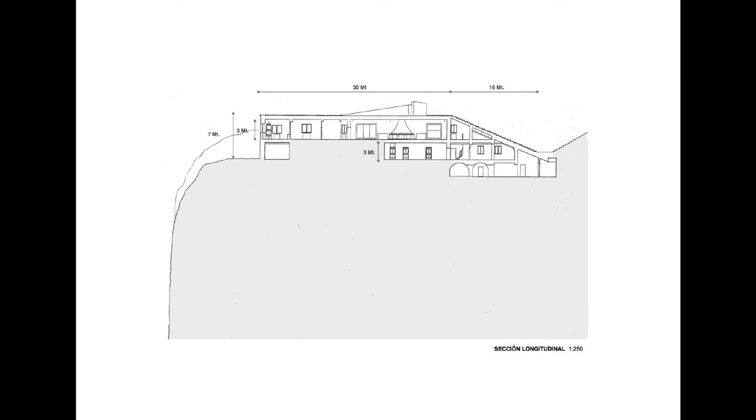You can see the entrance part, you can see the exterior staircase to enjoy the view, to enjoy the horizon and make connection with the sea. You can see the bedrooms, you can see the lights. So this is Villa Malaparte, a really important part, a really important period, a really important spot in modern architecture history.

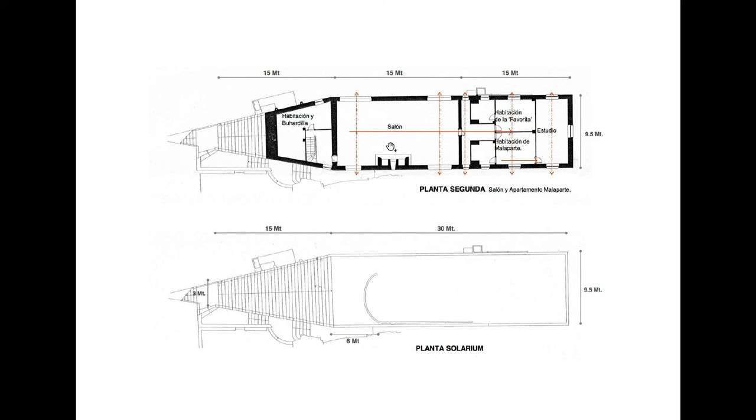In the plan, there's a special living area divided for the client, the writer Malaparte: the rooms, bathrooms and studio where he could work, the saloon where he could invite guests, and underneath it small bedrooms with really beautiful views to the ocean, to the sea.

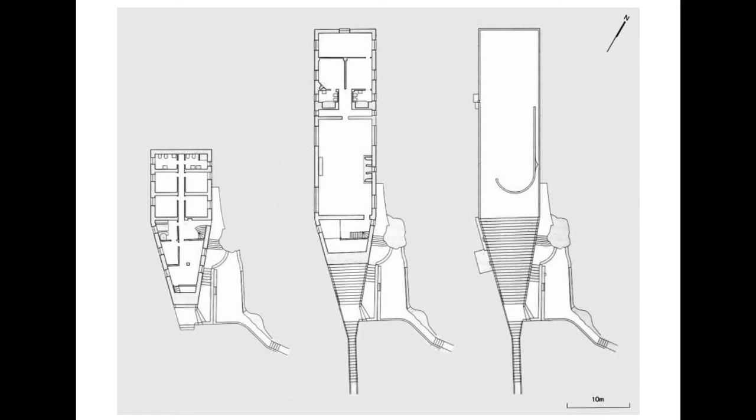And this is part of the cliff. It's between an art object, a cliff, and a building. That's how you can preserve a little bit of the natural environment and not use all the sources that are there—just the place and the material that you need.

It's really beautiful. Okay, let's continue with the Wall-less House again, from Shigeru Ban.

He believed that the material does not need to be strong to be used to build a strong structure. The strength of the structure has nothing to do with the strength of the material.

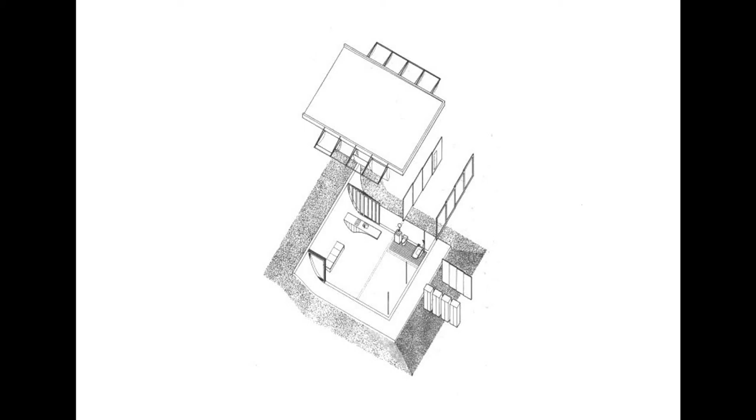Try to understand this: Shigeru Ban shifts from the horizontal living platform into a vertical boundary in one seamless move, blurring the edge conditions that make spatial reading possible. Its Cartesian geometry is deformed to meet program requirements.

A field of wall-ground hybrid protrudes into space like a table. The surface formation establishes a universal floor on which spatial zones are positioned around isolated objects of sanitary equipment.

Space becomes adaptable and interpretable in the bounding of specific areas related to the program. There is a shift of interior and exterior spatial boundaries. Rooms that were once public can become private and vice versa, simply by using the sliding windows and sliding walls.

In the house without walls, vocabulary must change. There is no bathroom, no bedroom, no living room. The wall-less design informs a roomless language.

You can see there is the bathtub and the toilet in the middle of the space. There is a wall-less space, a no-room zone, a roomless situation, and you can just separate the life of the house with curtains and not anything else.

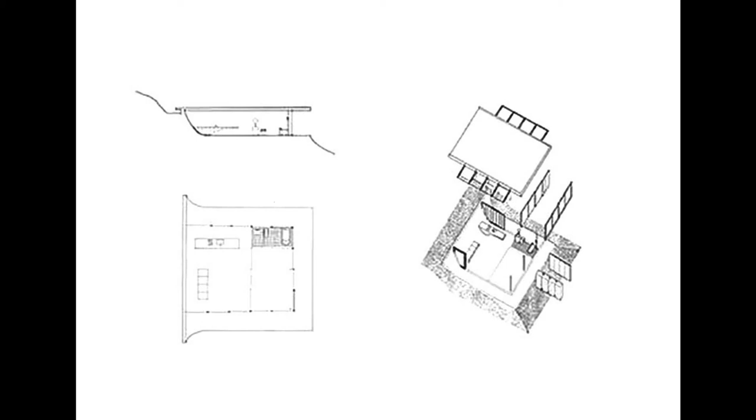The roof is flat and is fixed rigidly to the upturned slab, freeing the three columns at the front from any horizontal charges. As a result, bearing only vertical loads, these columns could be reduced to a minimum of 55 mm in diameter. All the walls and mullions were purged to express the structural concept as purely as possible, leaving sliding panels only.

Especially, the house consists of a universal floor, on which the kitchen, bathroom and toilet are placed without enclosure, which can be flexibly partitioned by the sliding doors inside. So you can create the spatial system in the house via the use of sliding doors, sliding elements.

I know it's really hard to think how we could live in that kind of space, but this is how architecture evolves, how this is changed. Sometimes you have to make experiments and you have to break the rules. And this shape of the wall and of the hill is really a nice connection and a nice meeting point between the built and the natural environment.

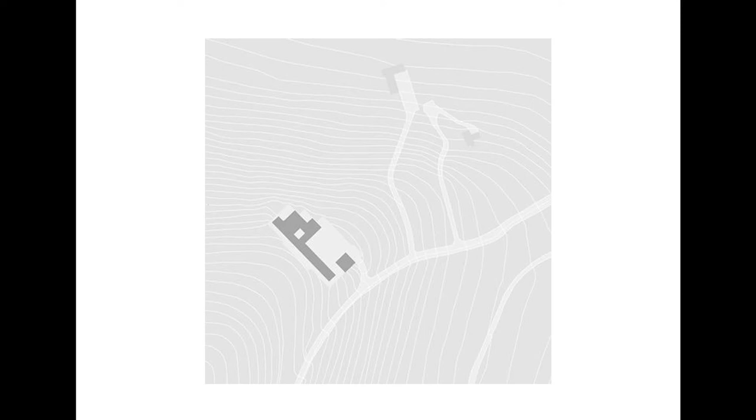Pale brickwork, broad columns and a courtyard planted with trees are all features of this country house in the Chiltern Hills by architect David Chipperfield, which was recently named the world's best new house. Designed for a property developer and his wife in Buckinghamshire, Field House is a single-story residence that stretches across a steep landscape.

It won first prize in 2018 at the Architectural Review House Awards, and many other prizes after. The house is located in the Chiltern Hills, a densely wooded chalk escarpment of over 300 square miles. Responding to this, the building was conceived as a large earthwork dug into the sloping ground. Its roof is set down well below the level of the tree canopy, while 4 sunken courtyards are concealed behind the walls.

The site had previously been occupied by an early 20th century house made up of a series of 8 buildings, including stables, a gym, a greenhouse, and an outdoor swimming pool. As with many of his projects, like the St. Louis Gallery in Missouri or his own office in Berlin, Chipperfield chose to simplify, creating a single 888 square meter building, all one level, not two level, not three level, no basement.

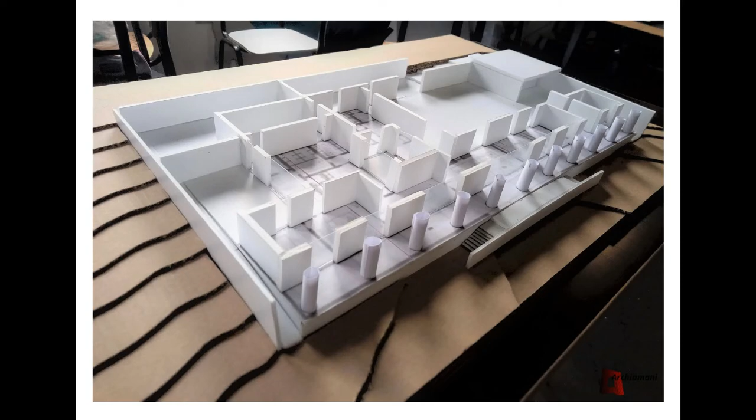Just integrate the building into the sloping ground and keep the shape and line of the natural environment. He said this array of structures, together with hard landscaping, had accumulated in an ad hoc manner with little relationship to each other or to their environment. The development presented an opportunity to restore a typical landscape by removing all the conflicting features that had been superimposed onto it.

To negotiate the changing levels of the ground, the house is built on a 60-meter wide plinth. The studio described it as being like a dam sitting on the cusp of the slope.

A colonnade framed by 11 round columns extends along the entire length of the facade, creating a sheltered outdoor space that connects with many other rooms inside the building.

An opening towards one end leads through the largest of the house's 4 courtyards, which forms the main entrance. It features a paved surface, 3 trees, and more sheltered terrace spaces.

The walls, the columns, and the plinth were all built using custom-made white brick set into a lime mortar that was applied thickly, then sponged off, leaving a thin residue behind.

The white color of the bricks and the lime mortar is reminiscent of the chalk beneath the house. They said on one hand the house appears as a natural escarpment in the landscape, while on the other it affirms itself as a man-made structure, expressed by the robust brick columns placed in front.

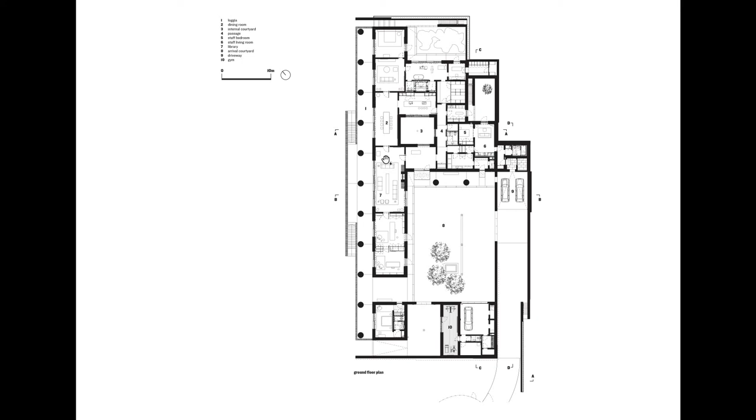And of course there is a connection between the rooms here, a long foyer through the hall there. That's what you can see in these pictures and in this drawing, the slides.

You can see through the building the public social activity places. It's a paper model anyway, from a student. You can see how it works.

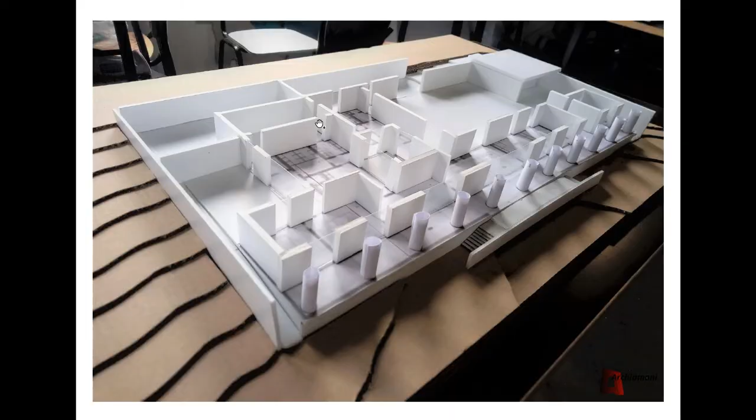One big area there, another bedroom, and the staff living area there. It's really huge, but because it's really flat and one level, it can integrate into the sloping hill and sloping area. It does not harm the natural environment.

Other spaces, including the kitchen, dining room, and bedroom areas, are arranged around the smaller courtyards, while rooms for guests are kept separate on the opposite side of the building.

The Fayland House was completed in 2013, and the Fayland House places a very large house in a special landscape without disappearing.

The domestic outdoor spaces, which have always been an issue in English country houses, are addressed in courtyards, which is an innovation. It takes normal elements and manipulates them. The colonnade in the front and the way it modulates the scale on the landscape is very interesting.

This was the opinion from the architectural review committee, and the prize was judged by including very famous and good architects. The house, anyway, is located just 5 miles away from the river and the Rowing Museum in Henley-on-Thames, making it a perfect first major project in the UK.

And it's a really nice solution for how you can respect nature. And this was the last house for today.